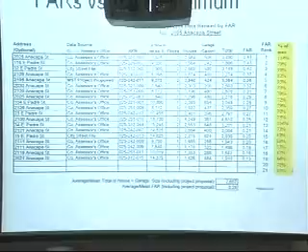So the idea was that this would give red flags in some cases if the proposed project was at the very top of the ranking, and that would give the Single Family Design Board an ability to see how far out of the range of the other homes they might be, and if it still might be within the range of appropriateness or not. But without this data, I think it was a little more difficult for the Architectural Board of Review to really see where some proposals were fitting in.

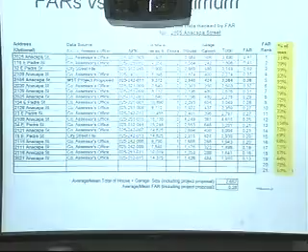So there's a couple examples of these types of data in your report too, and Tony's going to talk a little about it in one of the proposed changes as well. So the question council was asking was, is it reasonable to be asking for this? Some of that data is coming from the assessor's office—most of it comes from the assessor's office. It hasn't been entirely updated, some of it might be dated. If applicants want the most accurate data, they're going into our records here at the city. We have seen some people do that.

Is this still useful to the Single Family Design Board, knowing there may be some issues with accuracy? And it's our perception from the staff standpoint that yes, it is still useful information, even though it's not 100% accurate. It's accurate enough to at least give you a feel for what's going on in the neighborhood. You can see the range that's happening and where the proposed home fits in. So we would report back to council that yes, it's effective enough, it's useful enough to continue using it during the Single Family Design Board process. And of course, we're interested in your feedback on all these items.

So then the second one was the appropriateness of FARs versus guidelines—FARs as guidelines versus standards for single-family homes in multifamily zones. For example, if there's a single-family home proposed in an R2 zone, should that have a standard or just a guideline FAR maximum? We felt at the time that a guideline was more appropriate for those neighborhoods, and as far as staff is aware, that would still be the appropriate way to handle that issue, with a guideline.

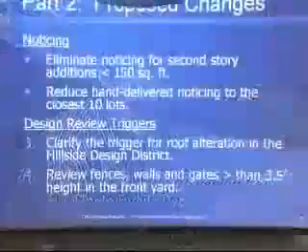The first one is to eliminate noticing for additions of less than 150 square feet to existing second stories. From experience, we've seen that these kinds of small additions don't generate any neighbor interest, and it just causes more complication to the process and takes longer to do the noticing. So it's kind of a minor change.

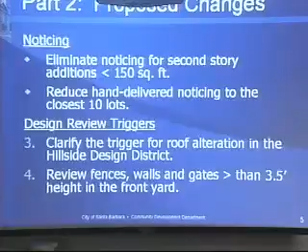I'll just go through all the changes. Okay, on to proposed change 2: reduce hand-delivered noticing to the closest 10 lots rather than the 20 closest. This would really reduce staff time. We have to use limited geographic information software to create a map showing which are the 20 closest lots to a project site, and not many staff members have the ability to do that.

We've also seen that most interested neighbors are the adjacent neighbors, not the neighbors farther away from a project. It just seemed to us that this would be over 85% covered. This is for the hand-delivered noticing.

Every time we do a notice for an SFDB project, we require that applicants, in addition to putting the yellow sign up at the front of the site, and the city mails notices to property owners—who may have addresses outside Santa Barbara, so they get one in the mail—also hand deliver notices to the 20 closest residents. We designate who those people will be and tell them which are the 20 closest lots. The idea of hand-delivered noticing has worked very well in getting people talking to each other, getting neighbors face-to-face before they show up here at the meeting. Usually neighbors have had a conversation about the project and know what the issues are, so they're not blindsided by comments here at our meetings. That seemed to work very well, but it really is most important for the adjacent neighbors.

The 10 closest lots would cover all those. If you think of a square grid, like a 3x3, 9-square grid with the project site in the middle, you'd have 8 or 9 surrounding that. So 10 in most instances would catch everybody who's adjacent in almost every case.

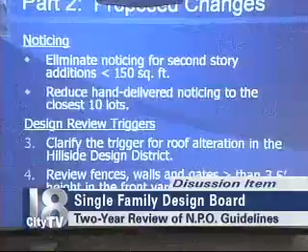Okay, so do we have any comments on these two items? Mr. Chair? Yes. I would like to comment that, from my limited experience, the hand delivering of noticing does give the opportunity for the neighbors or the applicant, the architect, to talk to neighbors that are close by.

Going to 20 homes and delivering the notices, I think most of the time there are people not at home, so you have to drop off a notice. Also, there are people outside the area who really don't care. They ask, why are you asking me this? That house is so far away from me.

Maybe 10 is the right number. Maybe 20 is too much. I don't think the noticing, the hand-delivered noticing to 20, should stay. I can see that being reduced.

Another reason, getting back to the map issue and having to create a map, we think that even without a map, we could allow applicants to figure out which are the 10 closest homes quite easily, without us telling them which ones. They'd figure out the 10 closest themselves. Whereas going out to 20, it gets more difficult to figure out which is the 18th farthest versus the 20th. You really need a geographic information system to do that when it gets that complicated.

We used to do it by a radius or something, didn't we? Within 300 feet or 100 feet.

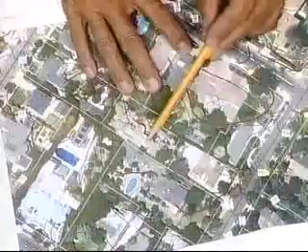It was originally a little house here and a small house here with a garage in between and a breezeway. That's where the original permits started with Corey Rapp back in 1986, 87. So I think it's important that you see with the trees and all the other things what's going on around it. If you haven't been out to the site, have all of you done a site visit yet, drive-by or anything? I did. So you understand how remote it is back in there.

I brought a copy of the permits along to show you that they got as far as up-framed, the sub-roof put on, the tar paper put on the roof, the tar paper put on the walls for the plaster, and then money flow stopped, and it has been sitting. It is the same owners, it hasn't changed hands. His children are now through college, and he's able to continue with the project.

So it's been sitting, and the house in the front was still the original house, so they've been living in the original house on the front, and the addition just stopped back in '92. You can see all the approvals they got for roughs, foundation, rough electrical and everything else up to the point where in 1992 they stopped. They needed to get the roofing on, all rough-ins by September of '92. That was the last note on the plan. So that's the history and background behind it.

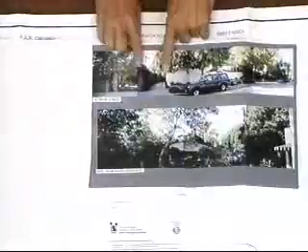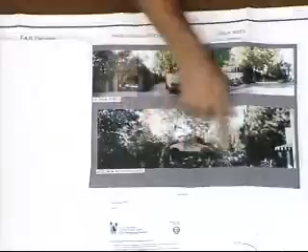So for those who haven't been there, this is the street scene coming in from Islay. This is the driveway going in. This is the house in front with a pool behind it. As you walk about 100 yards down this driveway, you come to this gate and the end of the existing house. This would be the driveway where you'd pull around and go into the garage.

So it's really buried back in the site. This is the house, that's the front house. The house in the front, and you walk up the driveway to get to its front door, and then you just keep coming, and you end up at the house in the back.

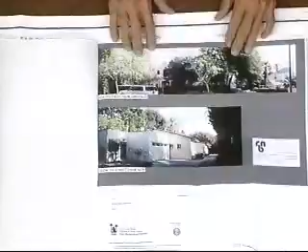This is the streetscape across the street, so you can see what's in the neighborhood. You can see there are large two-story homes in the neighborhood.

And then once you get back to the gates, this is the first thing you can see as you're coming to the back of the front house. I took this picture on purpose so you can see that you can't see even the tower or anything as you come up the driveway. You really have to be on the site in order to see it. And this is the state that it's in today.

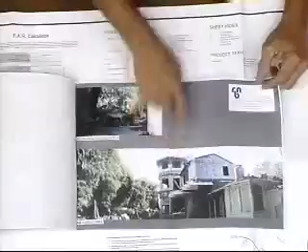That's what I call it. It is an occupiable space -- no, it is not. Well, it semi-is. It has a pull-down ladder so somebody can go up from this family room to that space, but it doesn't have a legal staircase. I see, it's an open patio kind of thing. Open patio, beautiful views of the city and looking out to the back of the mesa. Okay, I got it.

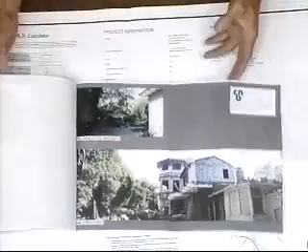So with that in mind, I'd like to go to the site plan. These drawings of the site plan, floor plans and elevations were taken from Corey Rapp's, and then we've done some modification to those.

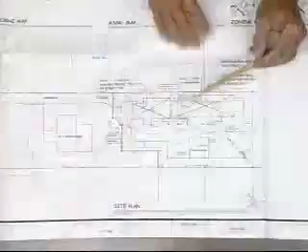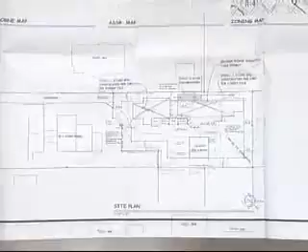There was a portion of the building that was approved, and you'll see it on the floor plans, sitting out here, and part of that was a breezeway, part of that was a garage. After talking with staff over a long period of time recently, we've come to the conclusion that we don't want to continue to have that space. We're going to remove what has been built there because it would require modification. So in order to remove all modifications off the table, for height, for anything, we're not asking for any modifications. We meet all the requirements. If we left that in, we'd be here, then we'd go to mod, then we'd come back, and we decided that was not that important.

So we have removed a portion that used to be a dining room in that area -- we're going to be removing it so we don't have modification, because the existing house was sitting in the setback, and this portion of the house is sitting in the setback, that little piece. We were going to have more, that was going to be new -- well, it wasn't new, but it wasn't occupied space before. It was a garage and a breezeway, so it wasn't occupied space, therefore it was a change of use.

So as you come down this long driveway, and finally get to the property, the garage is going to be here with its turnaround and the guest parking in front of it with the turnaround there. The gates are here, and the front door is around on this side of the house.

Okay, don't know how much you want to go into details. Here's the garage, the guest parking, the turnaround. Here's the front door. The living is on this end, kitchen in the middle with dining room. This was going to be the extension of the dining room that we're now going to remove. The master suite's at this end with the yard out here. The majority of the yard, the big palm tree, is back here with the trees all the way around the back.

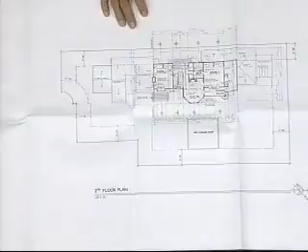That's the first floor. The second floor, which is the addition that meets all the setbacks, has 2 bedrooms, so it's the kids' area, or in this case might be the grandkids, now that the kids are off out of college. And in this playroom, there's an access ladder up into the tower.

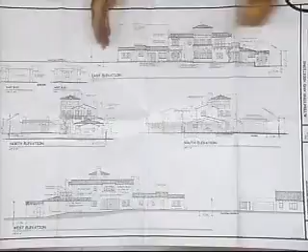And then the exterior elevation. Here's your front door in the middle of the house. This is the tower that you saw in the photographs. Everything that you see here has been up and framed. On this side of the house, it's up, framed, and sitting there, including the decks, and the spiral stair isn't there, but the roof pitches, chimneys are framed up, all those things. The thing that isn't there is the garage.

So here's the elevations of the garage. Going to do a flat roof, parapeted roof on that. On this back side, on the State Street side, this was going to be the addition, or it's already there, the dining room, and we've changed it to French doors looking out into that patio now, and gotten rid of the addition that was there.

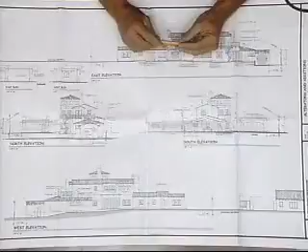We meet the height requirements. We meet, like I say, everything, so that we're not requiring any modifications.

Okay, Jeff has been to the neighbors, and I'd like for him to present what he did with the neighbors. Not to them, with them. Little slip of the tongue there.

Okay, the original notification affidavit is here, filled out. And then I did my walk around to all the properties that we were supposed to contact, and handed out this form. A lot of my neighbors were not home, in fact most of them. This particular one I got back in the mail from Dick Suding, and he has a little note on here of support. And then the other supporters are listed here. I just made a little statement above: We, the undersigned, have met with Jeff and Cheryl Long regarding the completion of their remodel project. We are fully and enthusiastically in support of this project and hope that you will lend your approval as well. There's names, and there's their addresses over there for that.

Why don't you point out, do you have the map? Point out which neighbors these are. I can explain it. Yeah.

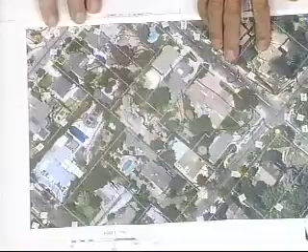Okay, let's go back to the site plan for a moment, or this one. This is probably better. In addition, let me add that Kyle Brace, our next-door neighbor, who is one of the primary neighbors along the State Street side, is here present, and she is in support of our project, and if you'd like her to speak, she's happy to do so. She's got a yellow slip for her, so she will speak.

When she handed us the yellow slip, she said, I really don't want to speak, I'm just here to say I'll support the project. So you can ask her. That'll be a quick speech.

All right, now we've got Santa Barbara, Islay. You got your brain in? Here's your driveway coming up here. Okay, Heather Gregory is the owner of this property here, that's the first signature. 1833 Santa Barbara, that is going to be this one. I think it's this little house right here, and I can't read their name.

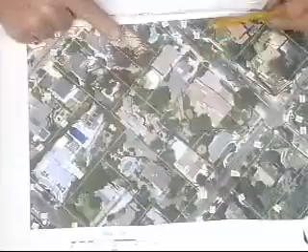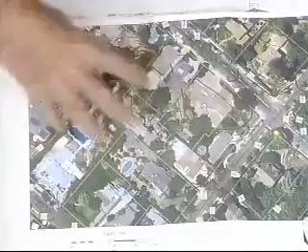Do you have anything on this, Tony?

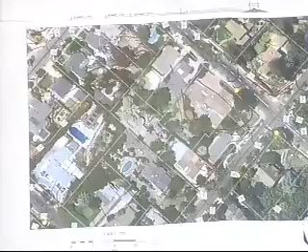Yes, Mr. Chair, this project's unusual because it's built, it's there in place now, and after the fact they're coming to you for approval. But this was underway back in the 80s, and back at that time it didn't require design review, so the ABR never saw it. Now it's coming to design review because it's a two-story. But we would ask that you consider the fact that they did have permits in place, so it's not like as-built. Of course, you still have to make NPO findings, see that it's compatible, etc.

Thank you. All right, I'll open a public comment here. Kyle, will you come forward and just speak right into the microphone there and tell us how you feel?

I'm Kyle Brace, and I'm at 115 East Islay, probably your closest neighbor, and I'm not in opposition to this project. I support it, from the standpoint of the neighboring property.

Thank you. Anybody else like to address the board on this particular item? I see no one coming forward, so I'll close the public portion of it, and it is to the board for your questions and or comments.

Gwen? Mr. Chair, two questions. Tony answered my third one, which was what kind of review happened in 1987, and it sounds like there was no design review required at that point. The second question was about the archive plans.

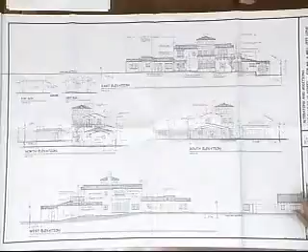Is this a different general design, or is that one little wing taken off, or has this whole house been redesigned? The drawings you have here are the ones from Corey Rapp, with the exception that we changed this to take off that dining room. So it was scanned and just put in. This is effectively what you got a permit for. Yep, this is the archive set. And then has a 20 closest home review been done?

You mean the stuff we walked around? I mean the FAR, the 20 for the FAR statistics. Yes, we need the statistics for the 20 closest homes, all the FARs, the floor areas, that kind of stuff. I can get it next week, but I don't have it in your format. We've done it, but not in your format, so we'll have to redo it.

What are, Tony, the other requirements besides the 20 closest home statistics when we go over 85%? We have a street panorama, some additional photographs. It's usually those two things we require when the application's submitted: the 20 closest FARs and a panoramic street photo with a simulation of the development and a streetscape elevation drawing. This is so far back, it's almost not in the middle of the block.

It's a flag lot in the middle of the block, but a few pictures of houses would be appropriate to bring us so we can evaluate the character of the neighborhood. So we'll need those two things when you return.

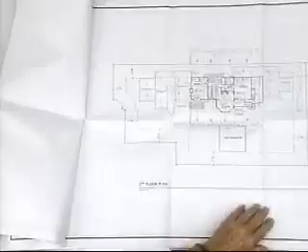Thank you, Gary. That's the number you were looking for? So, Mr. Chair, I had a couple questions. Are you adding any new driveway paving?

Inside the property line, yes. The driveway itself, we are hoping to get together with the neighbors and split on the existing driveway. It's a concrete driveway right now in fairly sound shape, but we do want to replace that eventually.

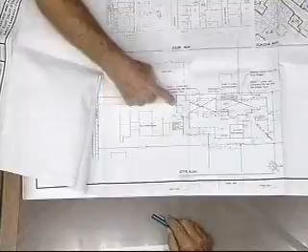Why does it go from narrow to more wide as you reach the garage on sheet 1? For maneuverability, in this area here, for the guest coming in and then turning around and going back out. As your house zigzagging on the street, the existing one-story residence, their garage is this one right here, and they need back-out space so they can make it down the driveway too.

Sorry, say that again. The house that we share the driveway with, this is their garage, and so they need turnaround space so they can back out of the garage and head down the driveway. So this wide piece is for traffic in and out, probably more for when you come here, to make that turn that way.

Radius there. My other question was, is the site already landscaped, or are there areas around the house that still need landscaping once this project's complete? Many mature trees, and here you can see the pictures. It's kind of buried, hard to tell what's around against the house, is what I'm saying.

Either bring us more pictures of landscaping around the house, the existing landscaping, so that can be evaluated, or a plan that shows, at least in a preliminary sense, what the existing landscaping is. A picture is probably easier, especially the trees. You want to have all the trees on that site plan. Okay.

Any other questions? Yes, Denise. I'm looking at the 1,250 square foot open space, and I'm noticing that it's hanging into the setback areas, and I don't think that's something staff allowed. I think that can go into the setback. It can't be in the front yard setback, but it can be in the interior side yard setbacks.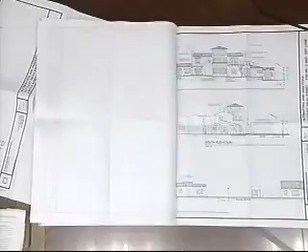Can I ask Paul a question? We have an opportunity to reduce square footage by taking the covered spa area in the back where the hot tub is, and keeping the tower square footage under 100%. That would be acceptable. What I heard from you is you didn't have a problem with the tower, but technically we're going to be over 100%. So you're going to take square footage somewhere else? Take it off the ground, take that off and add it in, and see how it calculates. Then I would say this board can make the findings because you're less than 100% FAR on the architecture. I just wanted to know that we have the opportunity to make the findings.

And altering this other deck? Yeah, we'll get some roof back there and get that away from the property line.

Excuse me, Mr. Chair, to clarify, Paul was right about exceeding 85%. Once you exceed 85%, you can't exceed 25 feet without going to PC. Oh, so we still have to, even though we're over 85. Okay, so that doesn't help.

The first set of plans we took in for this application had it just under 85%. That's when we did the plan check and saw it's under 85%, under 30 feet, so it's okay. But then the revised plans got above 85%, and we missed the zoning plan check correction. So you need to have some things to do. This is probably going to be over 85, so you've got to do the story poles, you've got to do some pictures.

Panoramas of the streetscape there on Islay. You're going to take a look at revising the area of the house to try to get it down somewhere between 85 and 100. So think about this tower, how you can do that, and also modify that deck in the back, on the second-story deck.

I guess I'd like to hear from the board, since they didn't have any other comments. Is the tower element okay if we do other things and get under 85, or does anybody have a problem with the tower element? Okay, then we'll work the numbers. I have some problems with it. Should we do a straw poll on that, or is it too early in the design for a straw poll?

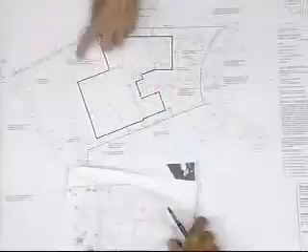Okay, we'll look at these plans then. You'd like to give us a brief presentation of what you're proposing? Well, you can see the footprint of the existing house. We are right on the ocean, so we have a 75-foot line, and then we have this 50-foot line that we don't want to go beyond without having to go to the planning commission. So we have concentrated all our remodeling toward the front of the house within the setbacks.

This is the modification here because we are altering windows that are in a side yard setback. The fence used to be 5 foot, now it's 6 foot. Our windows are being altered, but the total opening is actually going to be a little bit less. I think we've transformed this house from a 50s or 60s ranch into something more like a beachside cottage. That's our intent.

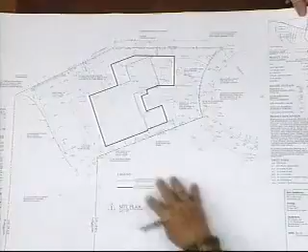I think we just approved a project in here. Yes, and this project right here is a very handsome house. Thank you. Did you do that one? That's it, yeah. That shingle was beautiful. Thank you. You're welcome. Okay, so this is your lot, huh?

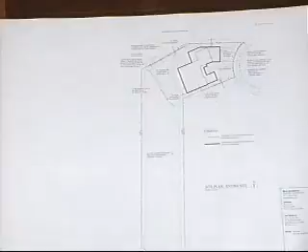So that looks like the existing house right there. There's just one big gable going like that, and another big gable like that. So now you're going to change the garage over to here.

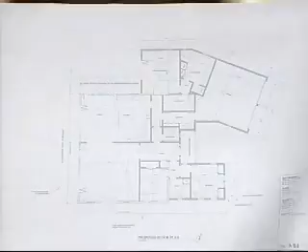Expand the living room, dining room, kitchen, bedroom, new master bedroom and master bath, okay? This is existing? Yes. Okay, there we go.

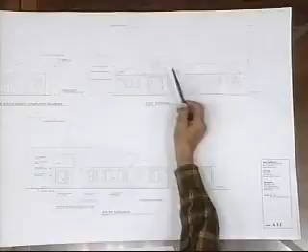This is a dormer that just lights the entry. Yes, so you have some volume ceiling there. This is the side where we're altering these windows. Right now they're very high aluminum sliders, strip windows.

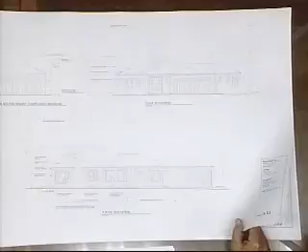And here's the west elevation. Now, how far do these go back in? Are those recessed? Not really. Oh, I just see that heavy line. I know, there's something that happened with the printing of this that we're not quite sure of. I apologize for that, the computer.

North elevation, okay.

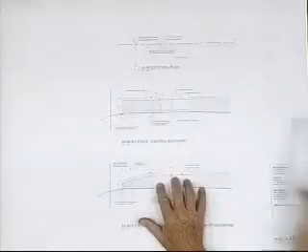Oh, and this is the fence. Now, is this in conformance with that letter and the neighbor? Is it Erickson or? I don't know, there was a letter I read from a neighbor that she had to negotiate. Yeah, here it is, that's the red house - Andy Erickson and Felicia Kashavarov.

They're here. Are you going to speak? I can if you need me to. Just wait, I'll ask you to speak. You fill out a yellow slip, and you can speak on the fence. Okay, we'll set that one aside.

This is just another set of drawings, right? Yes, I think we've got an idea of what you're proposing. You have anything on this, Tony? Any letters at all? We have a letter from Paula Westbury, and I think she's in opposition to the project. Okay, I'm going to open up public comment, and we're going to get this gentleman to come forward.

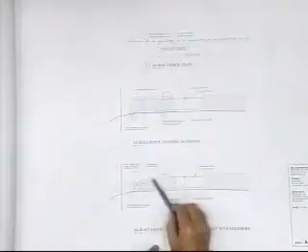I apologize that I didn't look at the fence plan, I think my wife did. Can I just see that? This is the as-built, as-modified per agreement with neighbors, and this is as-built. This is the existing fence of 6 feet, straight across, and now they're tapering the last 12 feet down to 3 feet. Yeah, that's right, I agree, and that's what you wanted to have happen. Yeah, that's fine, we came to a nice agreement on that. Thank you for being a good neighbor.

Pleasure, appreciate that. Okay, I see no one else in the audience to come forward to speak to the board, so I'll close the public hearing. It is now for the board, your questions and or comments.

Mr. Chair? Yes, Aaron. The hedge that runs along the fence, is that going to mimic what the fence is doing as well, since it says maintained at 6 foot? The 12-foot section, it goes straight down. Yeah, the revised plans actually reflect that the hedge would track the fence. Oh, okay.

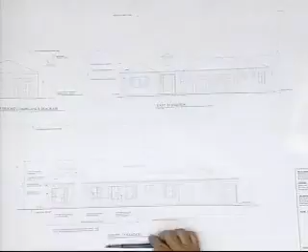Are there any questions? These are shingles, I presume, wood shingles, and we don't have a color board or anything like that yet. No, the roof is going to be composition shingles. We're going to have stone veneer on the fireplace. These will have shingles, shutters, and double hung or single hung windows.

Glenn, you have a comment? I was just curious about the photos because I didn't read it in the presentation. So, no comments. No comments, okay.

I would like to bring a couple of things to the board's attention. I don't have serious problems, I like the architecture. However, I want to make sure everybody understands that this property, if you look at the lot, the big portion of it is all downhill all the way to the ocean. So the house only has a little flat space, and I want to make sure the public views aren't going to be blocked by this addition.

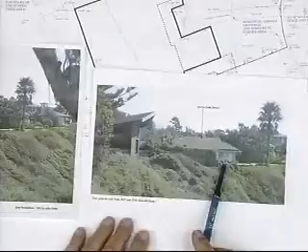We have a picture taken from Douglas Preserve. Let's take a look at that. This one is from the Douglas Preserve, and this is your house here. I'm not moving it any more forward because it'll all be within the 75-foot line. They're not adding anything onto that part of it. No, it's going back.

May I continue? Yes, you may. Just so the board's aware, when we get this type of project, the FAR is really a little bit deceptive because the lot size isn't really what we're working with. I want to make sure everybody understands that. Yeah, we talked about that earlier today. The FAR breaks down really in terms of these oceanfront lots that are mostly downhill. True.

Gary? I think it's a good project. I'm okay with it, there's modifications for these windows, I assume. We're going to have to go to a modification hearing officer, but I think we could have positive comments on those windows, and I think there's a generous setback from the street. I think the project looks good.

Mr. Chair, I would agree, positive comments for the project. We can't take any action because it has to go get the mod approved at the PC, but I'd say continuance back to full board for preliminary and perhaps final. We should recognize it's a one-story structure, and all the work is on the front side of the house, so there's no significant impact to the ocean view except for the enhancement of the quality of architecture. Very, very high quality architecture.

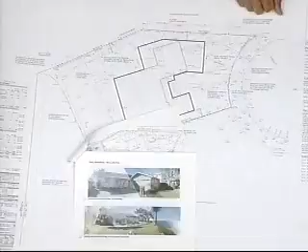From the street view, it looks like if that goes, I would recommend adding another tree or some kind of landscape to the front of the house. Do we know where that is? It's within the building, inside the garage. So when you come back, let's have a preliminary landscape plan at least to show how you're going to replace that. That's going to be important, to replace that tree with something appropriate.

Mr. Chair? Yes. Just a comment for the applicant, to get Parks and Rec's okay to remove a tree that's in the front yard setback if it's in that zone, and then your landscaping plan will take care of the mitigation of how it's replaced. I think it probably isn't in the front yard setback, it's further back. But let's show where it is, and show what you're going to do to keep this cul-de-sac enhanced with a beautiful tree, a new specimen. Good.

Okay, any other comments? So we have a motion for a continuance to the staff hearing officer, and it goes on to the PC for their coastal development permit? Because this is going to the PC anyway, the planning commission will be reviewing the mod at the same time. So we'll be making our recommendations to grant the mod for the window changes and siding changes, etc. Then it can come back to us with everything - color board, the whole works, details - and we might be able to give you final.

Excuse me, Mr. Chair, I was wondering if it would be possible for this one to return on the consent calendar after going to PC. How does the board feel about that? We want to continue this to the consent calendar. The architecture looks real good, so it can just go right on to the consent calendar for final, or preliminary and final.

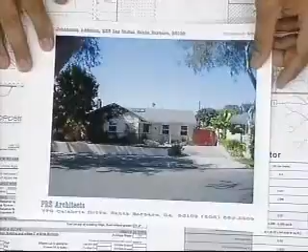But when you got to see the story poles, and I do actually have some pictures. Pardon me one moment. Some pictures of the story poles in place for the people who hadn't had a chance to drive by. This is looking at it straight head-on, and then I added the yellow lines from the sticks. And then this is looking at it from the side yard, and it shows the proximity of the neighbor's two-story house and our two-story house and the existing chimney. And then this is further up the street.

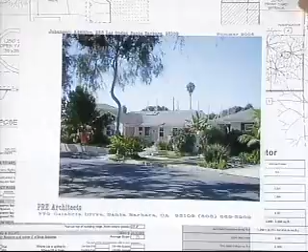So when we drive through the neighborhood, and we all have driven through the Marine Terrace, we see a lot of strong second-story houses that are 20 feet or 30 feet from the front yard, and they have a different impression to the pedestrian.

That's what I was trying to make clear with the story poles. The change in the design, I'll be quick. We did change this roof pitch to 4 and 12. Our existing house is 5 and 12. We kept this gable as 5 and 12 to match the front, so when people look at the front of the house, everything lines up. No one's going to perceive that this is a 4 and 12.

We were able to reduce this ridge by 10 inches. Originally, I had that all across the same. In the story poles it shows, and in the architecture it adds just a little bit more interest.

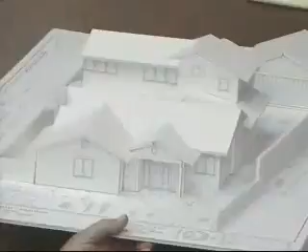I want to briefly go over the FAR statistics. The last time I was here, I did not reprint this one. We did make some reductions. Our project is 37% of the FAR, which is 93% of the allowable. We are now the second largest, where before we were at 39%, so we were the largest house FAR and the largest square footage. Now we're the second largest.

When you look at the square footage, we still are the largest house in the 20 closest homes. But like I pointed out the first time we were here, there are a lot of houses that are under 6,000 square feet, some 900 square feet with a one-car garage.

And the proximity of our neighborhood, this is where our house is. We have San Miguel, and these lots in here come to a point, so there's a lot of basically substandard lots square footage-wise. There were less than 6,000 square foot lots, 1 story, two bedroom, 1 bath homes, which kind of altered the statistics.

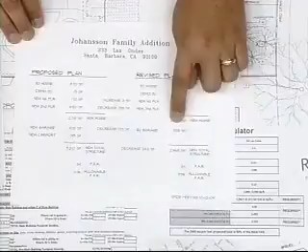What we did in our project, this was what we originally proposed, and this is how we revised it. On the first floor, we tweaked the front entry, which increased our total square footage by 3 square feet. On the second floor, someone made a recommendation that we push it back 3 feet, a decrease of 138 square feet. In the garage, we decided not to do our glorious garage with all the extra bulk storage, so we kept with 388 square feet, where before we were at 495. So we reduced the overall project by 242 square feet.

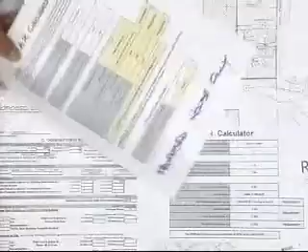I really wasn't very clear on that, I didn't have the statistics on the top of my head. The other statistic we try to do is what is our FAR when you look at just the house alone. If you just do the house at 2530 or 2580, we're at an 80% FAR. That was something we were trying to figure out, what is just this home, because this garage does not have any impact for the neighborhood.

So that's the project at hand. There were a couple questions about the height. I talked about how we reduced the pitch. And then for the architectural detailing, I added a detail sheet as well as a landscape sheet today.

This is a project that I did in Mission Canyon. I'm following the same details, though I made a minor change on the way this gable is done. I'm setting this 4x6 in 1.5 inches into the plaster, so there's not so much of a shadow line at that point. These 4x6 have a plumb cut, with a 1x4 fascia board on there, and then an OG gutter to create a shadow line.

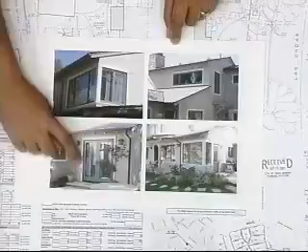The doors and windows would have this type of detailing, and I have lots of corner windows in this project. It's becoming a theme I've noticed as I go through some old photographs of mine. And we have a color board we put together.

Remember, we had some concerns about the materials. We changed everything to just a straight stucco house. We got rid of all the wood siding, because there was wood siding on the original part of the first floor and on the garage. We now have a 100% stucco house.

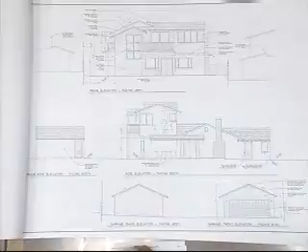A discussion was about whether or not to have 2 colors, and we drew a couple things up with 2 color schemes, but we decided to stay with 1 color. That's kind of a peachy color, and it matches exactly the existing color. This looks very yellow, but that's just the bright sun, this is the actual color swatch.

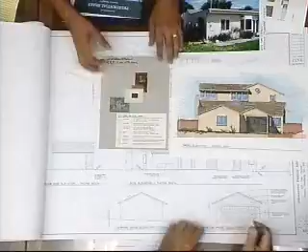I want to close with the architecture and massing shown here. Even though it appears to be, by statistics, 93%, the project does not present to the street a maximum site development that is offensive. This project belongs in the neighborhood, fits in the neighborhood, and will be a nice addition.

I think we've got it pretty well in mind. Do you have anything on this, Tony? Mr. Chair, the staff hearing officer approved the mods and did not have any conditions on that approval. Okay, and do we have any letters? No. All right, I'll open up the public hearing.

I see no one in the audience, so I'll close the public hearing, and it is to the board for your questions and comments. Mr. Chair, we can take an action on this. This could receive a preliminary approval as a basis for working drawings.

Mr. Chair, one question. Paul, do you have any aerial photographs showing the context with the neighbors? At this point, I don't think so. I know I don't have them here. I don't think I've ever turned any in, so Tony wouldn't have any in the files.

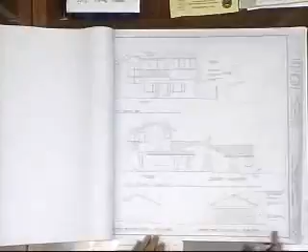There is a skylight that happens here, and the skylight will be for venting. And your solar thing works okay on this roof? Yeah, it's a skewed angle, but yes, it does work.

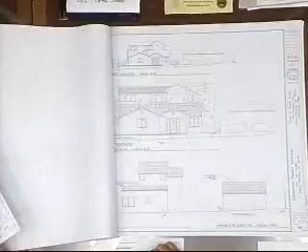And you've revised this porch and made that a lot more friendly looking. Actually, I did not revise this porch from the last presentation. Oh, didn't you? No, the first time I was here, I had a different solution. Okay, any questions?

All right, then we're ready for comments, if you people are ready. I have a question, Mr. Chair. Is there any overhang over here, or is it? It's actually flush - it's going to be like 2 inches, kind of an overhang. It's reflected in those photographs.

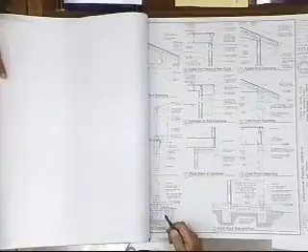There's also an architectural detail. Up here at the top, I'm putting a 1.5 inch blocker so I'm able to wrap it out a bit, so this is only a 1 inch overhang versus the 3.5 inch, which I didn't like in the other example - so I'm modifying myself as I get older. You have your window details - people are always concerned, and this is actually a real sill here, with trim underneath it. At the head piece, there's a piece of plywood behind it to make it proud, just a smidgen, shown in this photograph as well as the overhang. This is probably going to be Trex lumber, a manufactured wood, so it wouldn't have as much maintenance as real wood.

Are you going to bump those out a little bit? The elevation is shown right here, half an inch. Yeah.

Gary, you have some comments? The window trim looks good. Appreciate that. Okay, Chair? Yes.

Okay, I'd like to make a couple of comments. Okay, Glenn?

I went out and looked at the story poles, and nothing raised an alarm to me. Driving up the road, I saw the neighbors and the additions that have occurred, and the massing on this house didn't raise any flags at all to me. Gonna make the garage bigger now?

You can try. The only issue, and I appreciate the changing of the materials to all stucco and the roof pitch to a 4 to lower the ridge and the detailing, is that I think everything's looking good.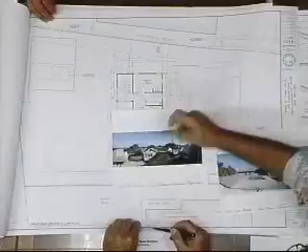Here's the view looking south. So here's a deck, and here's that open yard right there. So those taller windows will be looking directly at that deck. That's right here, and here's sort of a downward shot as well. I don't think the addition is quite that far because here's the line on the wall. But that was the only concern that kind of came up to me.

I guess my response would be that it's a bedroom, and they're not really going to want to be showcasing themselves at that corner window. But I hear what you're saying.

Is there a street elevation? Yes, I do. Wall that shows the adjacent house. Can we make a comment? Yeah, here it is. Does it make a difference if the neighbor's house has a second story looking into our backyard? It's a factor. There's something there, and we're just concerned both ways.

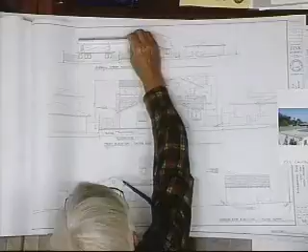But where's your scale? Yeah, 1/8 scale. We've got a separation of about 20 feet between those two houses, and the adjacent house that you're concerned about is a little bit lower, so it's stepped down a little ways.

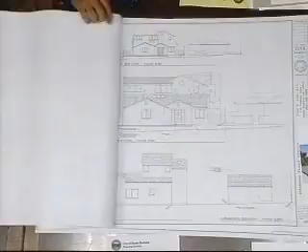Why don't you, now that you brought that up, let us make our comments now. So what's your determination? Do you find it acceptable or not acceptable? That's what we're here for. One, I just wanted to bring up the issue so the rest of the board members were aware.

And two, wondering if there were any options for raising the sill height. I'm not sure there's a whole lot of area to put any screening, and you probably don't want screening on that side anyway. I actually thought of that question on my own. If I can go to the floor plan, I'll come up with an option.

We actually kicked around this - currently I have 2.5-foot windows across this area, so this adds up to 5 feet, and this adds up to 10 feet. I'm thinking of putting one window here of 3 feet and 3 windows here of 3 feet each, which makes this 9, so I can reduce this by 2 feet and this by 1. Because of your comment, we're going this direction. If I move this over, I'm not changing the architectural theme with the 3 and the 1 if I go with a 3 foot.

And this is higher, though. These windows are higher. These are extremely higher, these are lower.

The interesting thing I have here is the owner would like to have, and it's not shown here, 2 steps, and we would like to raise this up plus 18 inches, shown as a dotted line. But if the owner chooses not to do this, this sill height has to be at 42 inches, 3'6", which is what I set it at. So if the owner chooses to put in this 18-inch increase, then I have these window sills at 2 feet. Does that make any sense?

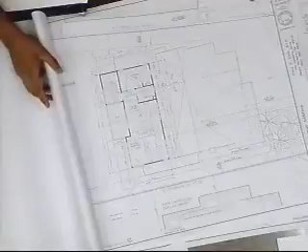I can show you on the side elevation. Okay. Right here, it is. It's shown at 2 feet, and I show this 18-inch piece, so this right now is at 42 inches.

Will that, if they put that raised platform in there, meet code? Yeah, because it's more than 18 inches, so it'll meet code. The thing too is egress - I have a sliding glass door in the same area, so I don't have to have those 100% openable.

Well, are you going to raise the floor, or aren't you? The owner would like to raise the floor, yes. So we're talking about the floor being up here, right? Correct. So why don't we put that sill up there at 42 inches? Actually, I think you can go up to 44, can't you? You say you already have access out the door, so this will still work over there. Yeah.

You want the window down closer to the floor, so when you're in the bed you're able to look down and see the pool, because that's their view. Is this your pool here?

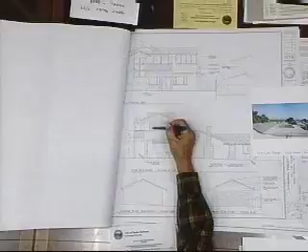Yes, that's their pool. So you're thinking about having one 3-foot window here? Correct, and one around the corner. I would have three to carry the theme - three here, three here. Correct, and one 3-footer there. I think that would be good.

It would be an improvement. I think that would help. I'm not happy with that. All right, it's your house, you can say this. Let me get that.

Does anybody else have any other comments, or is this the only thing? I'd like to just put my comments on the record, because I'm probably not going to be agreed with. First of all, I really appreciate all the effort everybody's making, and I did go look at the story poles several times. I looked all around the neighborhood.

I just have really two comments about the reasons why I don't support this project. One is when an architect says the statistics we're looking at are, oh, they're just 2-bedroom, 1-bath, or they're little cottages, but that's where the neighborhood started. And if we start looking at the 2-story remodels as what we're comparing with, our whole guidelines are going to be defeated. So that's one reason.

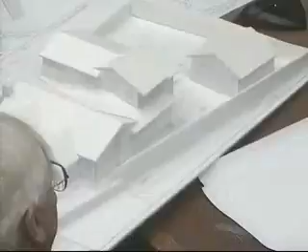As far as landscape, you probably don't need to plant the Texas needlegrass in a 5-gallon, you can get it in 1 gallon. And the Santa Barbara daisy, you probably should spread that out a little farther - it spreads pretty well, it's planted pretty close together. Okay.

Denise? Well, I'm not enamored with the second story. There's something about the massing of it that's not working very well for me. I don't get the little round window.

And I just, overall - I suppose one of the things I've always had in my mind about additions was that once done, they should look like they were always there, and for me this looks like an addition. I just don't see it as holding together, not looking like an addition on top.

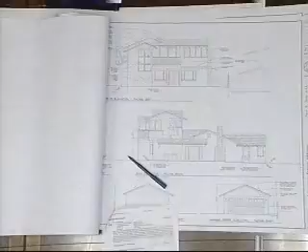Did you have any comments on the bedroom windows looking toward the neighbor? I think the architect has already told us he was willing to change these to 1 and 3 around on the other side, or maybe show some other combination. I think we want to see what you're thinking, rather than just say, well, that might be okay, 1 and 3.

We're gonna look at these. And how are these going to be? You've got another corner window here.

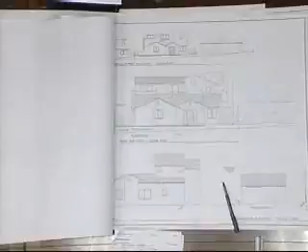It may be that 2 and 2 is better than 1 and 3. I don't think we can verbalize this kind of stuff. You've got to draw it and study it and see what comes out best.

Can I have my client make some comments? You may. Or do you want to? Yeah, sure, I'd like to make a comment on the window.

But I don't agree with Paul. I'm not after looking into my neighbor's backyard. That's the first point. I'm after looking out over the views down towards the ocean and the beach. The bedroom, the bed in the bedroom will be towards the east here, right? So we will look out through these windows. Making them smaller would then cut off the view that we would have from the bed in the bedroom, so yeah, I'm not at all interested in that.

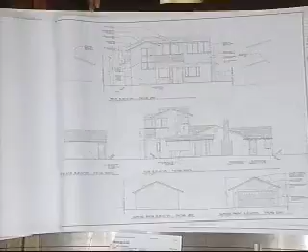Well, as far as changing the windows on the top, what do we have on the front here? We can make them 2 and 2 and 2. We can even eliminate that, and we can get rid of the porthole there, yeah.

Well, I think what we're talking about here is a study of the proportions of things. They are very important, and all I can say is looking at the lower floor and then the upper floor, there seems to be an inconsistency that the architecture up here doesn't quite match what's down here, and somehow that has to be resolved.

I don't think we can design it here at the table. I think the best thing we could do is take a vote on whether or not this can receive preliminary approval or not. And if it doesn't, then we've got a different kind of problem in front of us. And if it does, then you can make some further studies and come back to us when you think you've got it.

What will be acceptable to the board? I understand you want it to be acceptable to your client, but it also has to be acceptable to the board. So we're a team working together here. We both have to be happy, or we can deny it. I don't think you want to get a denial on the basis of some windows.

What we're understanding is that we would like the proportion and consistency of the windows on the second floor, which is the new addition, to be more consistent with the windows you're proposing on the first floor, and give some consideration to a different material that may not work out. I can see that it may not work out, but it might lend additional character and charm to the house. Because this is one of the bigger houses in the neighborhood, we want it to be absolutely top notch. That's your task.

Paul, there's some use of brick, maybe some use of brick. You mean I can add some brick like a wainscot at the front door? Something, there's something you can do. Is that what we took off? Okay, I just wanted to clarify that. That's what we took off from the beginning. Yeah, well, we don't want to get into too many materials. I think one of the problems before was there were too many materials, and so you've gone in the other direction to one material.

It is a big house, Paul, and it might really benefit from a different material, a lighter material on the second floor, and possibly a different color then too. The vinyl siding is a lighter material.

Is there any other comments on the motion? All in favor say aye. Aye. Opposed? Aye. Okay, there's 2 in opposition, and 1, 2, 4.

I'm voting for the motion. Yeah, I'm voting for the motion. And I would say that we have to make the neighborhood findings for this, size, bulk, and scale is acceptable, right? You made the motion. Yeah. Size, bulk, and scale. Now, high quality of materials and compatibility with the neighborhood.

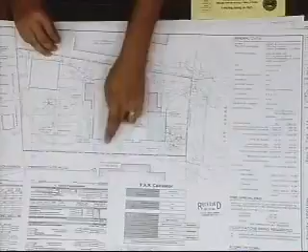Two weeks continuance. And then just to clarify the motion, that the two items actually be three items that we're addressing in the motion: the corner window, where we are to study alternatives; we are to study the window proportions of the second story that face the street east; and then we are to study the exterior building material for the second floor.

I would include all the windows facing the street, including the one on the first floor, because they can be made bigger, right, to match the ones on the second floor. So we could make this a three-bank window to match the three-bank windows on the upper floor. I actually think that wouldn't be a bad idea.

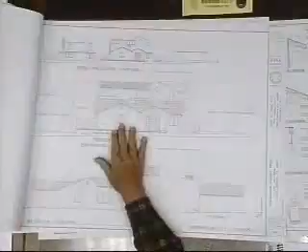Well, my feeling is that window proportions are something you have to draw and look at and decide what is the best. We can't guess. I just don't want to limit it to the second story windows. The thing that I feel is that if you take these three down here and then you're going to put three over here, this thing is going to get very windowy, and that might not be acceptable either.

So I think you just study. Once you start something like that, it's not consistent around the sides and so on. I think the direction is we need to study and have consistency in the windows, and that doesn't necessarily mean that 3 is the magic number, because consistency means consistency on all 4 elevations.

And remember, we're trying to keep this in character with the neighborhood. So when I'm looking at this here...

The house across the street - in the same vein that we just talked about the second floor windows and the first floor windows, I personally would be open to different materials on the first floor as well. Like wood, like what I wanted to begin with. I thought it would be much cuter if it was just an all wood house. But it's an option.

Unfortunately, you have to understand my client's perspective on the mixed messages and coming up with a solution to satisfy a majority of the people, or what I would feel is moving forward. It's just kind of - I've been consistent. Well, I know.